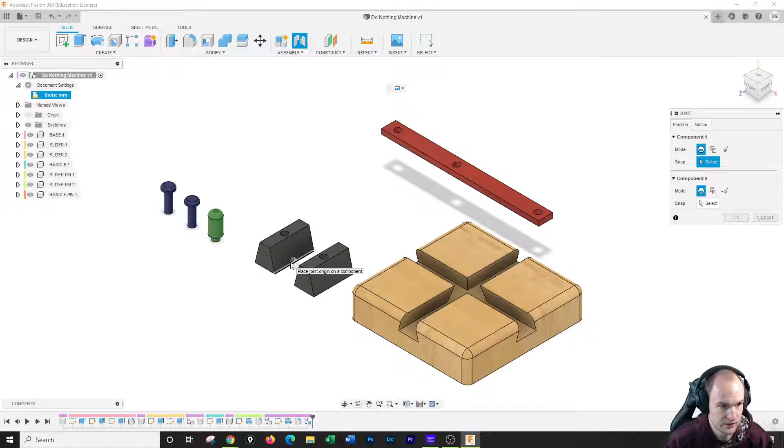I'm going to grab that bottom edge, and then grab the same bottom edge at the base and see if it goes in the way I want it. That looks good, and the type of joint is a slider, so the motion is slider. That looks wonderful. I'm going to do this again.

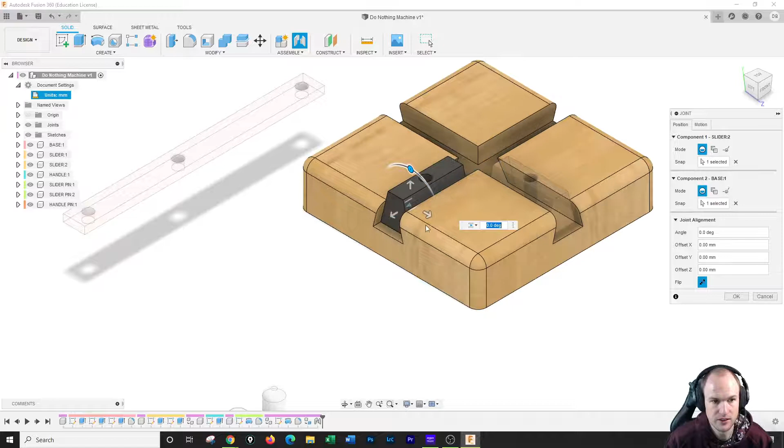I'm going to do this here. You can see it's a slider, and I think I want it to go here. I might be wrong, we'll see. But nope, it turned out good. If it wasn't good, like if it went on the wrong side, you'd just have to redo it, flip it over, and do it on the other side. So I got my two sliders in.

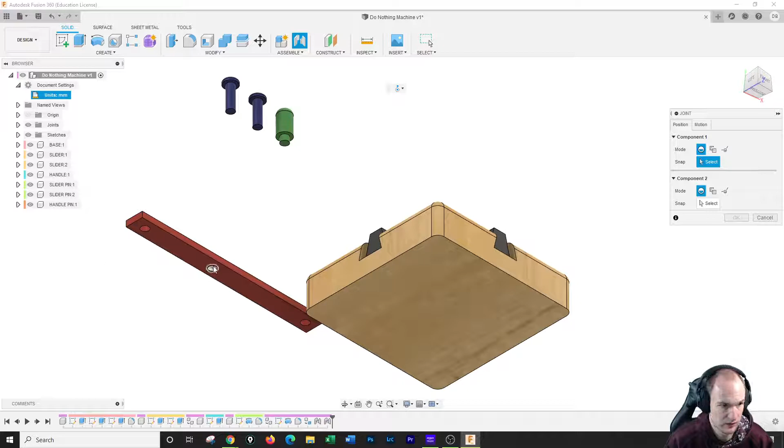I'm going to set my handle up with a different type of joint. This time the motion is going to be called a revolute joint. And I want this right in the center here, on either one of these it doesn't matter, right in the center here. And it's doing the revolute thing, so that's cool.

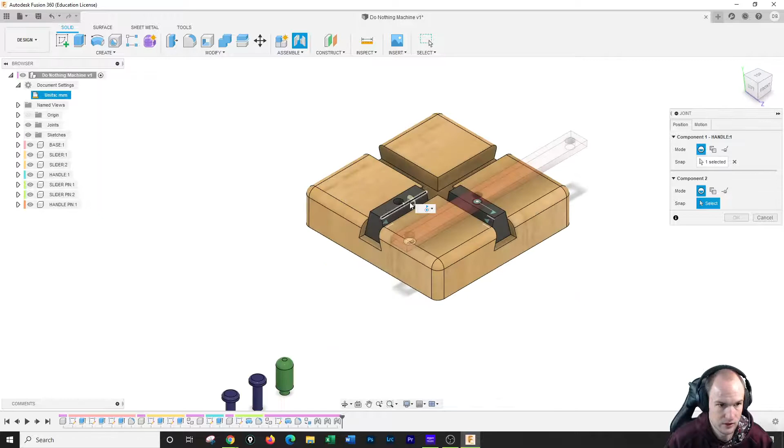I'm going to do that again. I gotta rotate to the bottom here. We got that, very good. And I'm going to get it there. It does its revolute thing. And you see it moved it because they are a revolute now.

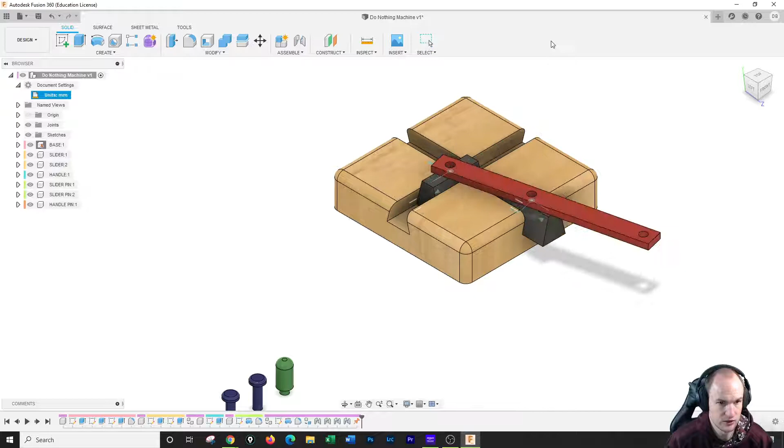I'm going to take the base, right click on it, and ground it, which I should have done immediately. Because if you do not ground something, it's going to cause issues when you try to do this.

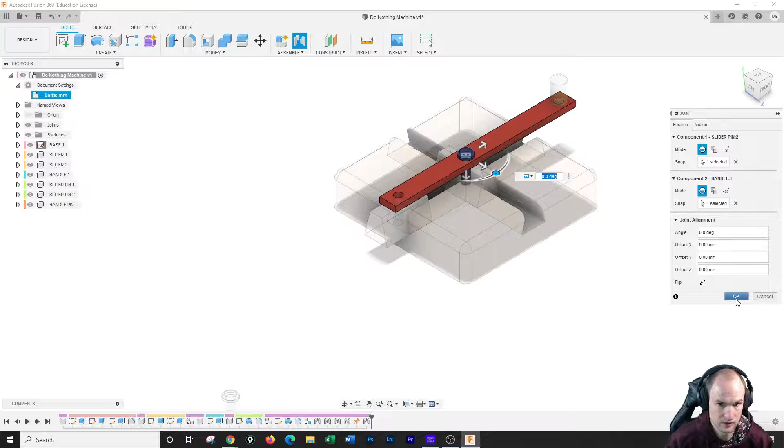All right, and the last three are much simpler. Continue, and these are going to be rigid joints, from the bottom of the pin to the top of the handle. That's good. Same kind of deal with these guys: bottom of the pin, top of the handle. Yep. And once more: bottom of the pin and the top of the handle.

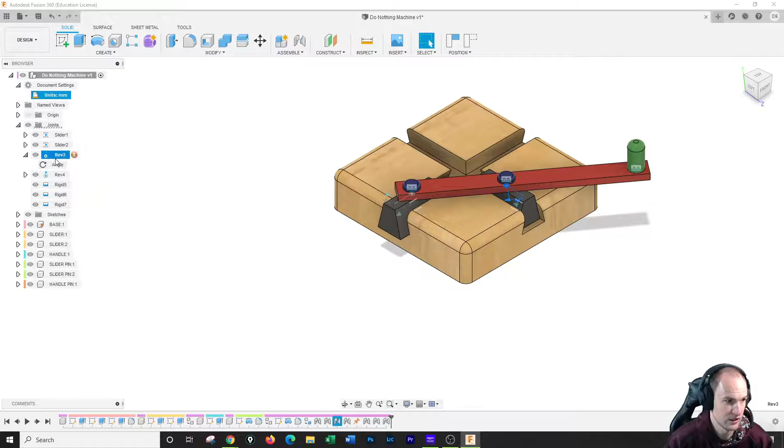All right, so here we go. Our do-nothing machine, which we can flop around with to our heart's content. And if you wanted, you can go into joints over here, and if you went to this revolute joint, you could right click and go animate model, and it'll do its thing. Isn't that glorious? So this is how we do the assembly for the do-nothing machine.